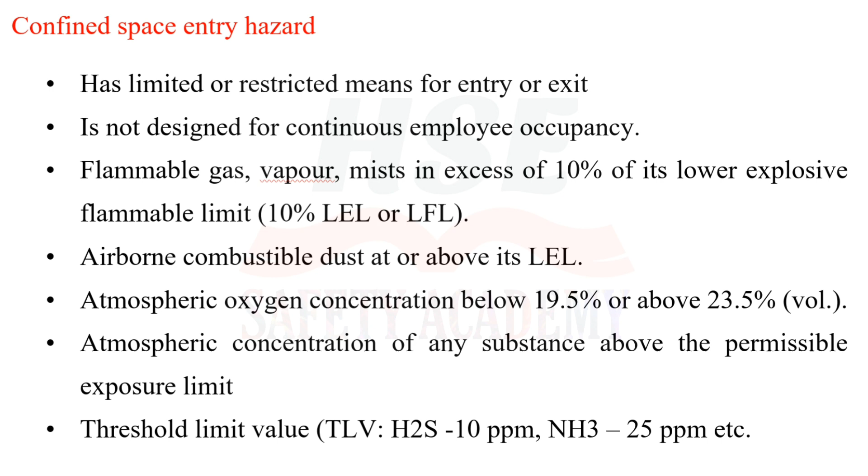Threshold limit value, TLV: H2S 10 parts per million, NH3 25 parts per million, etc. Oxygen deficiency, less than 19.5% volume. Presence of toxic, corrosive or hazardous materials: H2S, hydrocarbons, NH3, sulfur and coke dust. Presence of flammable, combustible, explosive or pyrophoric material, for example sludge.

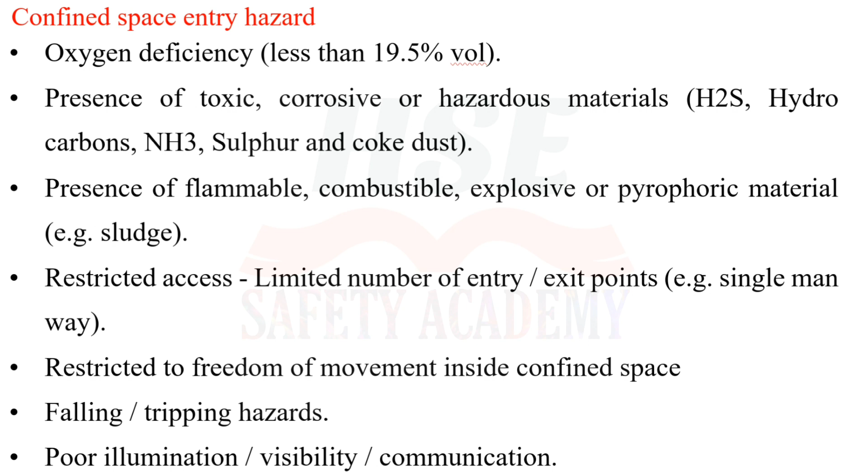Restricted access. Limited number of entry and exit points, for example single manway. Restricted freedom of movement inside confined space. Falling, tripping hazards. Poor illumination, visibility, communication. High temperature and humidity. Electrical, static or radioactive hazards. Mechanical hazards, for example tank mixers, falling objects such as tools, refractory.

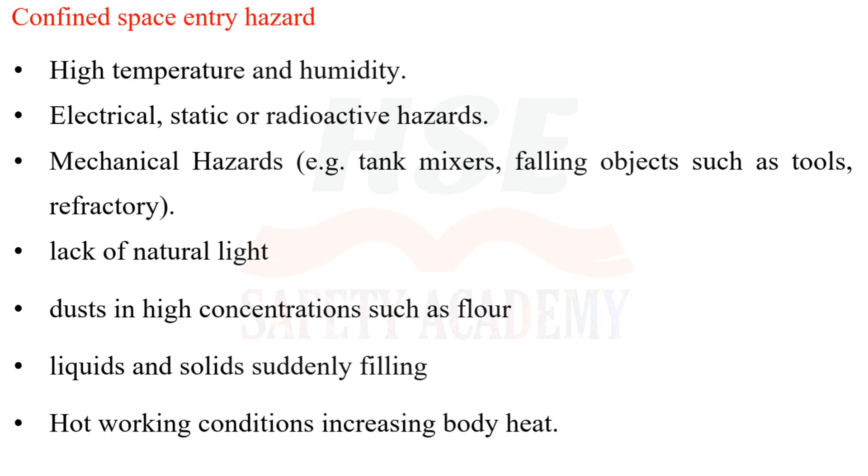Lack of natural light. Dusts in high concentrations such as flour. Liquids and solids suddenly filling. Hot working conditions increasing body heat. Flammable or explosive atmospheres. Harmful gas, fume or vapor. Free-flowing solid or an increasing level of liquid. Excess of oxygen. Excessively high temperature.

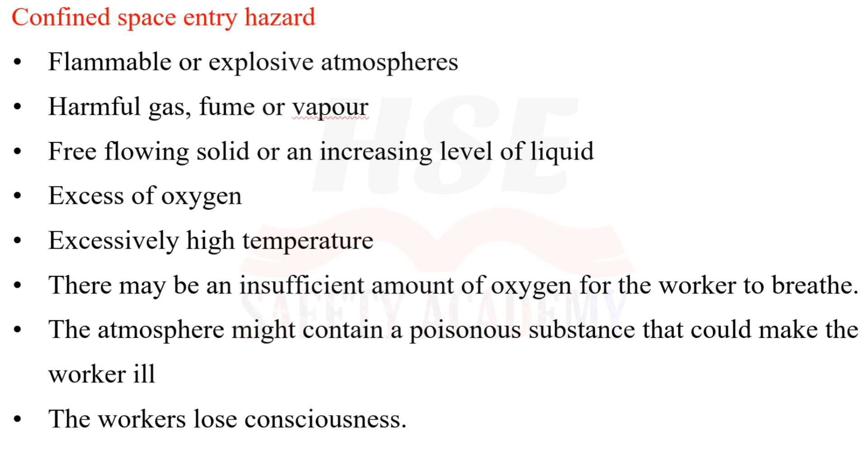There may be an insufficient amount of oxygen for the worker to breathe. The atmosphere might contain a poisonous substance that could make the worker ill. The workers lose consciousness. Natural ventilation alone will often not be sufficient to maintain breathable quality air. Hazards from asphyxiants. Asphyxiants are gases which can become so concentrated that they displace oxygen in the air, normally about

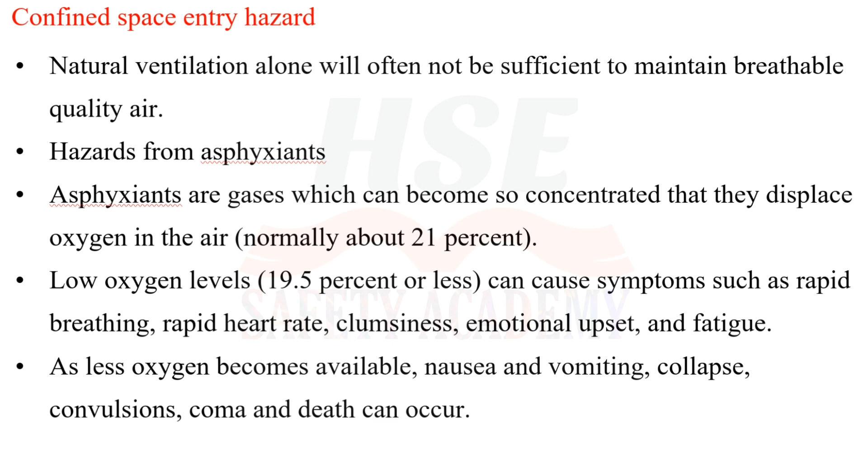21%. Low oxygen levels, 19.5% or less, can cause symptoms such as rapid breathing, rapid heart rate, clumsiness, emotional upset, and fatigue. As less oxygen becomes available, nausea and vomiting, collapse, convulsions, coma and death can occur. Unconsciousness or death could result within minutes following exposure to asphyxiants. Asphyxiants include argon, nitrogen, or carbon monoxide.

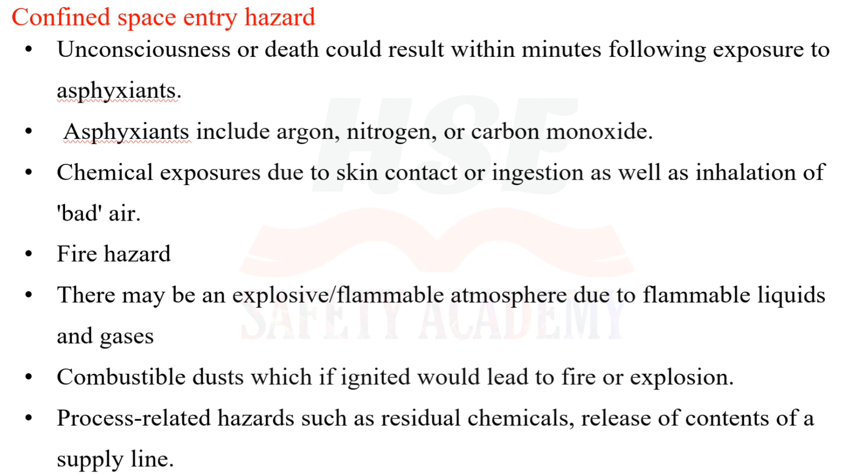Chemical exposures due to skin contact or ingestion as well as inhalation of bad air. Fire hazard. There may be an explosive, flammable atmosphere due to flammable liquids and gases. Combustible dusts which if ignited would lead to fire or explosion. Process-related hazards such as residual chemicals, release of contents of a supply line.

Physical hazards. Noise, heat, cold, radiation, vibration, electrical, and inadequate lighting. Moving parts of equipment, structural hazards, engulfment, entanglement. Vehicular and pedestrian traffic. Shifting or collapse of bulk material. Barrier failure resulting in a flood or release of free-flowing solid or liquid. Visibility, for example, smoke particles in air. Biological hazards. Viruses, bacteria from fecal matter and sludge, fungi, and molds.

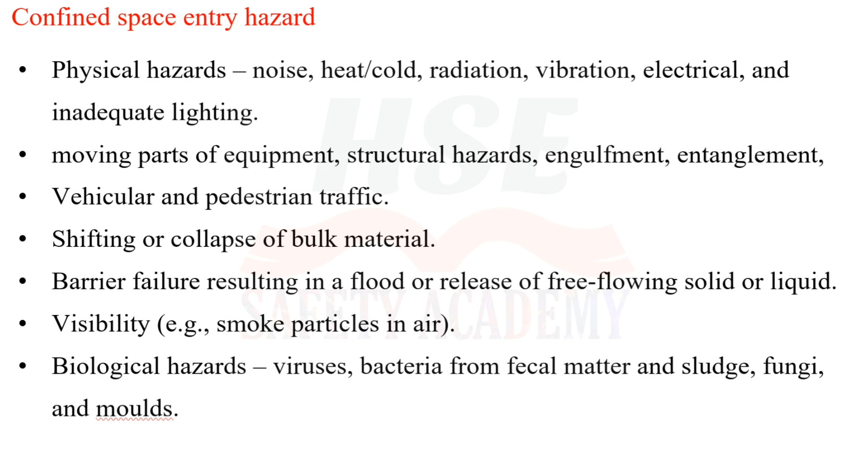Confined space entry safety precaution. Entry into all confined spaces shall be permitted only with a confined space entry authorization. Prepare the confined space entry site-specific and task-specific analysis, which shall be submitted along with the present hazards, precautions and waived items for company approval. Prior to work commencing, a valid work permit shall be obtained, attached with approved method statement and risk assessment.

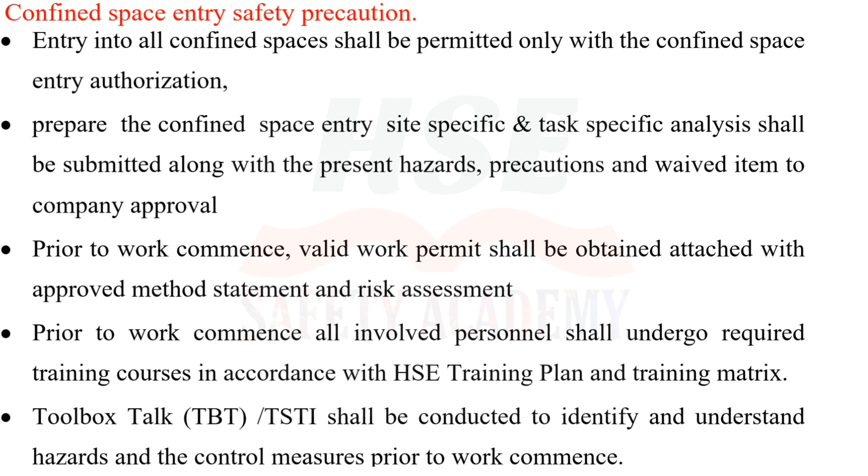Prior to work commencing, all involved personnel shall undergo required training courses in accordance with the HSE training plan and training matrix. Toolbox talk, TBT, TSTI shall be conducted to identify and understand hazards and the control measures prior to work commencing. Required and mandatory approved PPE shall be used by all personnel involved in this activity. Confined space entry safe work practices should be followed.

All personnel concerned shall take medical check-up and safety induction. Calibrated and valid certified gas tester and portable detector shall be used. "Confined space, do not enter" signage shall be displayed visibly at the entrance of any confined space. Establish a specific rescue plan and rescue equipment identified and available to effect a rescue in the confined space. Body harness shall be worn by all workers entering confined space.

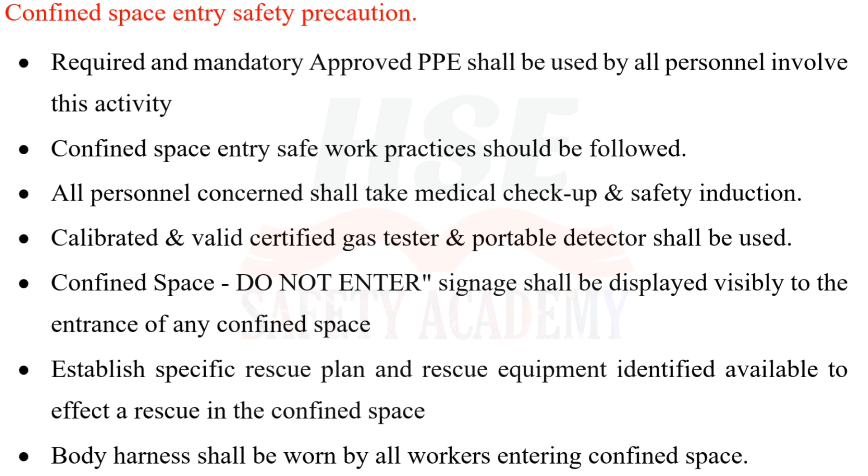The entry supervisor shall review all emergency procedures with all entrants and other related personnel and discuss this through TSTI. Emergency rescue from inside shall be made through proper lifeline, rope for horizontal, and the use of tripod for vertical. Verify and monitor the atmosphere by means of gas testing before commencing work. Gas testing shall be done before and during the entire activity to measure oxygen level. Find out presence of other hazardous gases. The testing must be done by an authorized gas tester.

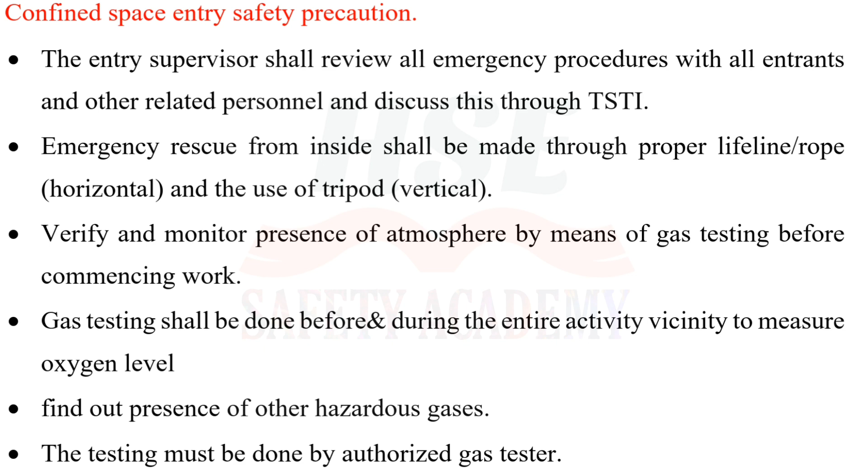A trained attendant, watcher, with attendant card shall be placed at the entrance and be able to communicate with workers inside. Only personnel trained and authorized with entrant card shall enter the confined space. Recognized communication method and equipment to be used between attendant and entrants. Use of audible signal, whistle. Buddy system shall always be implemented. Attendant shall check and control entry with a proper list, entry log sheet.

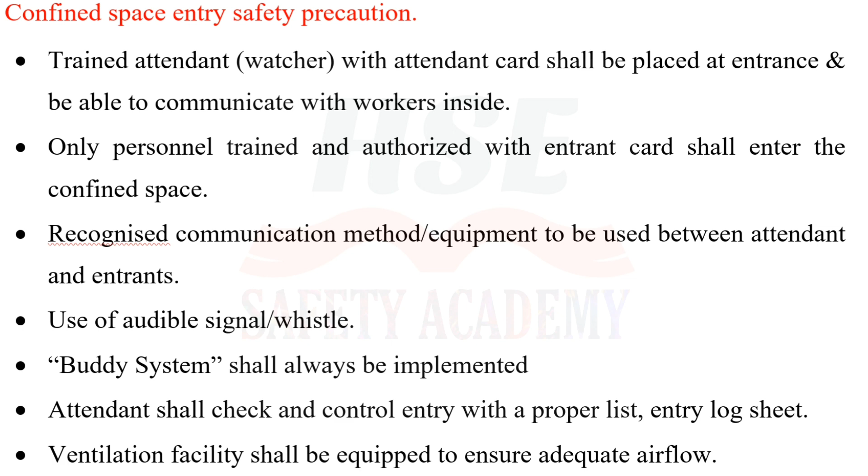Ventilation facility shall be equipped to ensure adequate airflow. Ensure sufficient lighting inside confined space. Entrants shall have a torch or personal helmet light in case of emergency or power failure. Hearing protection apparatus shall be worn. Ground cable shall be installed. Cables and hoses shall be properly routed. All power sources shall be equipped with 30 mA ELCB, earth leakage circuit breaker.

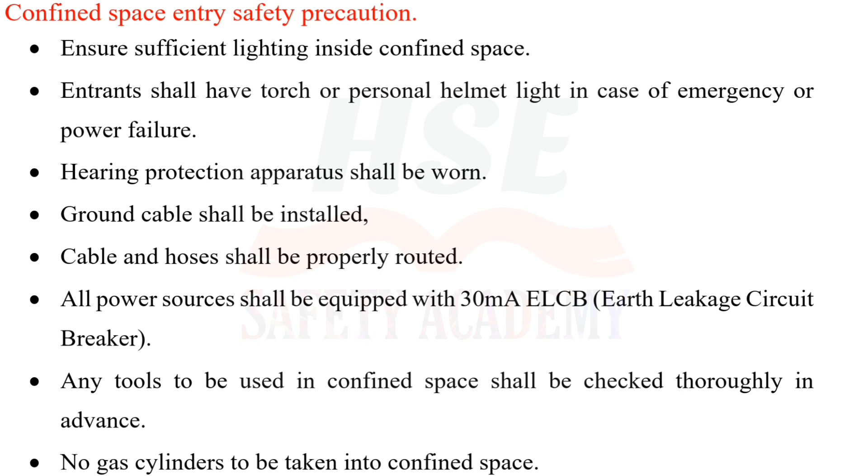Any tools to be used in confined space shall be checked thoroughly in advance. No gas cylinders to be taken into confined space. Do not introduce oxygen supply or cylinders into the confined space. Sufficient numbers of inspected and approved fire extinguishers shall be placed around the work area. All manual handling works shall comply with manual handling procedure. Maintain good housekeeping and use proper access to prevent slip, trip and fall. Workers must be provided with frequent rest breaks and job rotations. In case of emergency, comply with the emergency management plan.